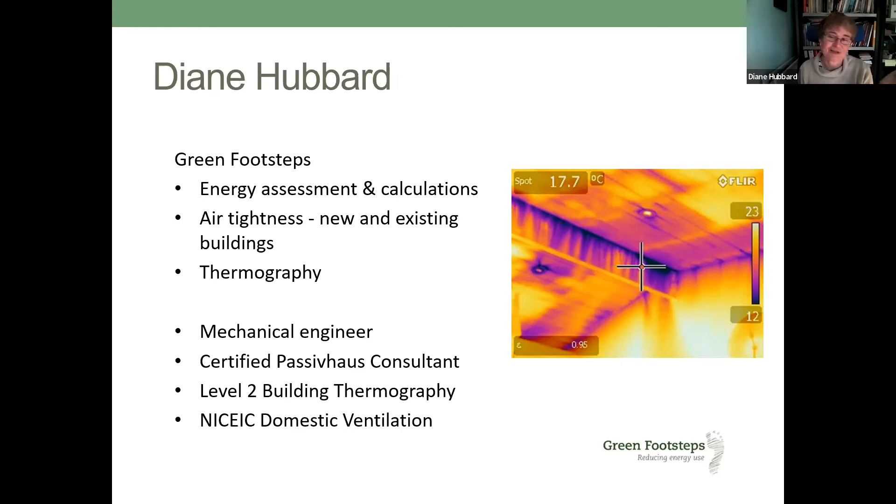So it was really airtightness issues that got me started on looking at windows and doors. I mean, I'm not a windows and doors expert, can I just make that clear? I've basically come to this because of the issues they seem to present people with.

One of the most common things I get is somebody ringing me up saying, I've spent quite a lot of money on, say, a new set of patio doors, and they are a problem. It's quite cool where I'm sitting in my kitchen, what can I do about it? And really, I got a little bit sick of doing these sort of investigations, to be honest.

It struck me that it would be a lot better to address and better inform people who are purchasing their windows and doors so that they make better decisions. It's better from the planet's point of view, it's better from their point of view, and it's putting in best practice. So that's the reason I'm really talking about these.

As I say, I'm not a windows and doors expert. The problems that come up, the most common one I find is over sliding patio doors. But so much relates to the initial specification by the householder. So really, that's the crux of what I'm going to be talking about.

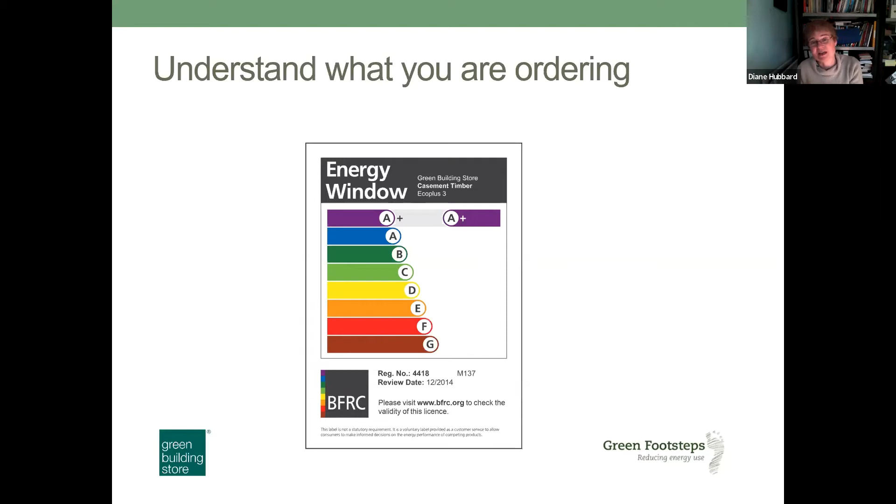Well, it lets light in. We get solar gain through it, but we also have to think of the window as a negative thing, because windows, compared to say wall fabric, perform very poorly because of their nature, because of what they do, because of the fact that they are glass and need to let light through. So we need to think about how the performance of the window compares to the fabric around the window itself.

So what I want to do is talk a bit more about key aspects of the performance. U values is something that's important. I'd just like to explain what a U value is, because it's a technical term and people may not be used to it.

Basically, the U value, the thermal transmittance, is a way of describing how energy efficient a particular thing is - in this instance, the window. If you've got a bigger number, it's letting more heat through, it's more conductive. A small number means less conductive.

To put some specific figures on that, a single glazed window has a U value of about 6. A high spec triple glazed window has a U value of around 1 or a bit less. So you'd lose a sixth of the energy through that window under the same conditions and area. The U value is really important, but we have to break it down more into the glazing performance and the frame performance.

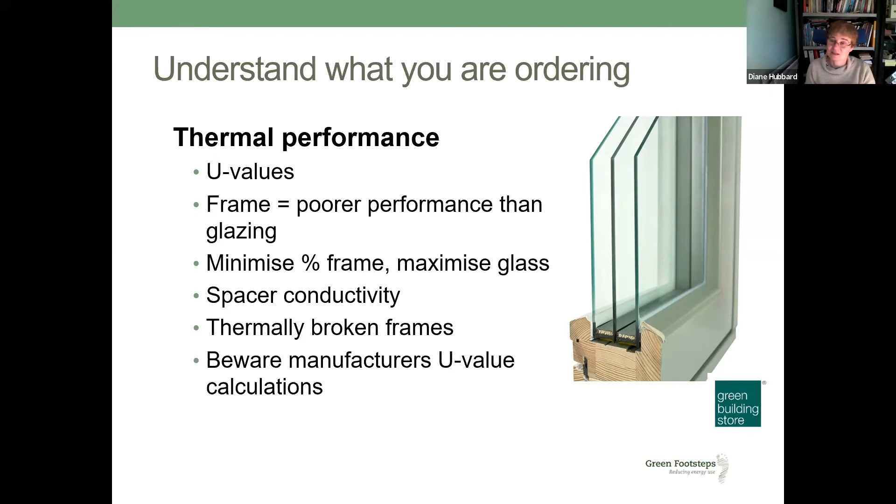Okay, so what do we need to consider when we're ordering? Now, my speciality is airtightness particularly. So the things that govern the airtightness they're actually going to get - because airtightness of windows does vary.

It's going to be determined by things like the style of the window itself or the door, and I'm going to come back to that with a couple of slides later on. But we've also got things like the door furniture and the type of lock - is it a multi-point lock? What are the seals on the window actually like?

I've had instances recently with very high spec roof lights, for example, not Green Building Store ones, another manufacturer, but roof lights that are quadruple glazed, but there is an issue with the seals with them. And on buildings that are passive house standard, small leaks on seals can be a concern. So think about what's your objective, what standard are you looking at, and then you need to be specifying things to fulfill those standards.

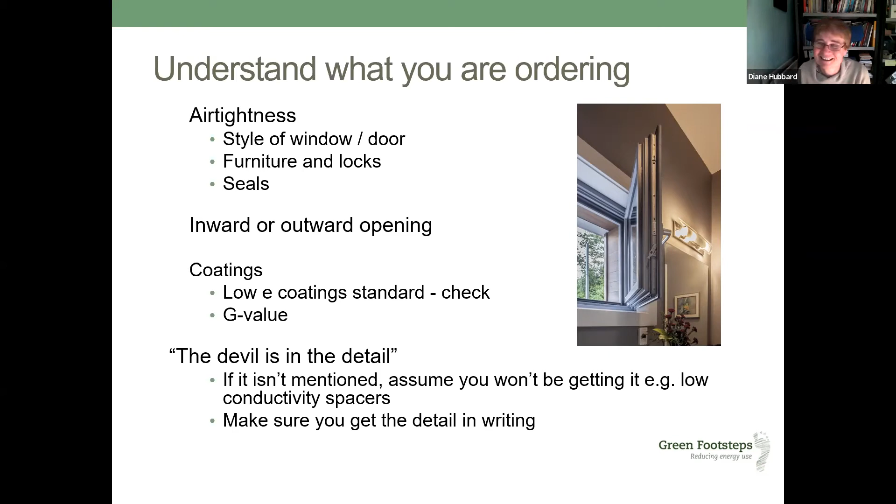Let's step back and think about higher level decisions. If you're remodeling your home, which a lot of people are doing—it's a great thing to do—and you're looking at upgrading the thermal performance, it's an ideal opportunity to remodel several aspects of the building.

Be careful about seriously increasing the amount of glazing that you have, and that's for a few reasons. At the end of the day it's your choice, but there are a few things to think about.

I mentioned at the outset the poor performance of glass compared to, say, a wall, particularly if you're insulating that wall. In terms of U values, if we're thinking about high spec glazing, let's use a U value of 1, for example. A high spec wall would be maybe 0.1 or 0.2, and normal building regs at the moment are about 0.3. So even with very high spec glazing, you're looking at ten times the energy loss through the glazing, or maybe three times if you're looking at normal building regs standard. So you're talking about a big increase in energy loss.

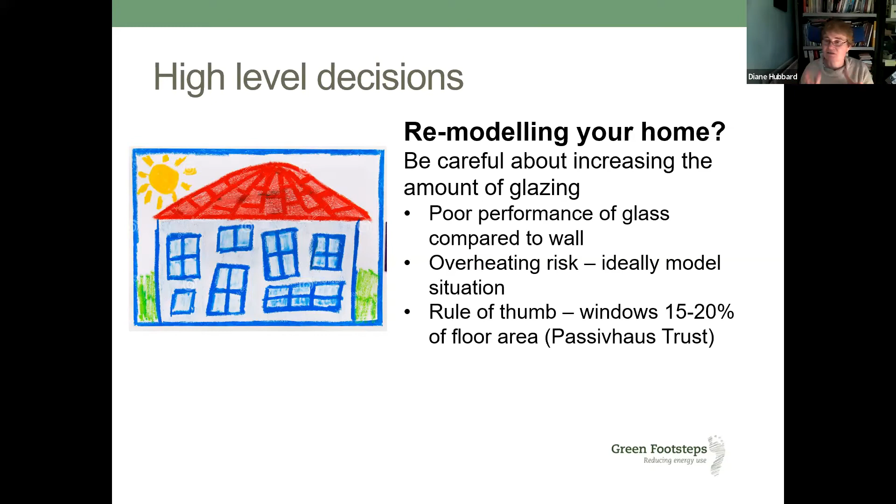Model it if possible, but if you're working off rules of thumb, bear in mind the figures from the Passivhaus Trust: 15–20% of floor area should be your windows. In a lot of cases it can be substantially more than that. At the end of the day it's your decision, but really think carefully about the issue of overglazing and what the consequences are.

So window style is another factor. I've touched before on the frame percentage, but the window style also governs the performance of what we've got, and also the cost. Let's explore that in a little bit more detail.

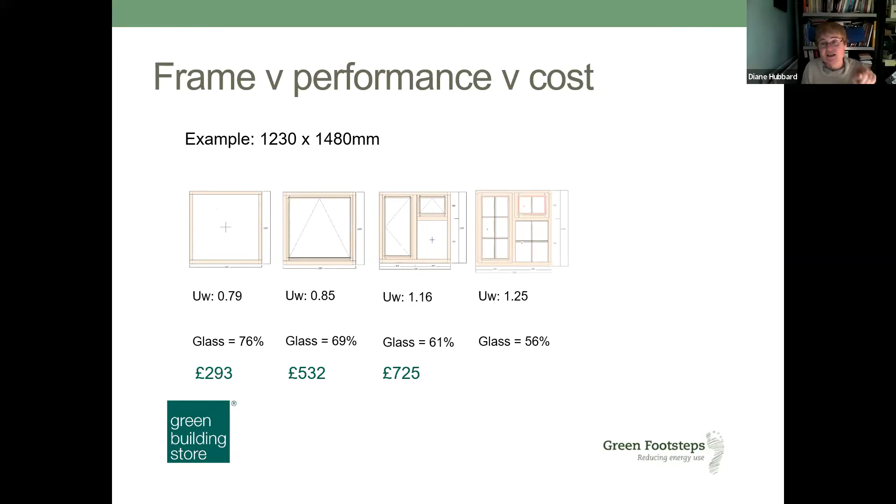So we've got an example here of a window, and we're going to look at various different scenarios. On the left-hand side we've got a basic fixed window, non-opening, and you can see the U value of the window. When it says UW, that means U value for the window as a whole. If it was for the glazing only, it would be called UG, and if it was the frame, it would be called UF.

So on the left-hand side we've got a fixed window with a U value of 0.79, and as we move through the different styles, the U value increases as the amount of frame increases. You can see the percentage of glass goes from three-quarters down to barely over half the window being actual glazing. So that's the issue of the frame.

You could use false glazing bars, so not actually breaking into the glazing, but the simplicity of the window is important. And then you start to look at costs. These are only indicative costs, prices are changing at the moment, but you can see how much the cost increases aside from the U value, the reduction, the poorer performing U value. So style is really important for what we need to consider.

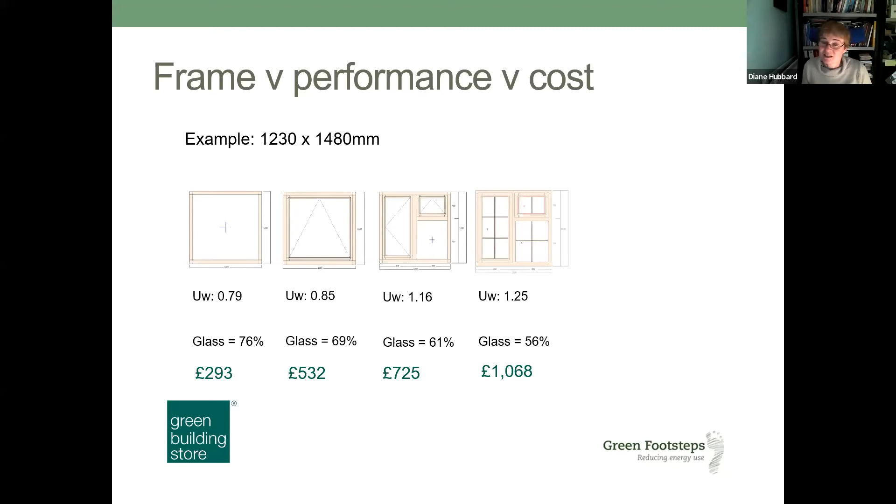So when we're looking at glazed doors, aesthetics can be really important. Depending on what you've got, you might have a beautiful view out of the door, and you want to minimize how much that is broken by the frame. Budget and performance are also important.

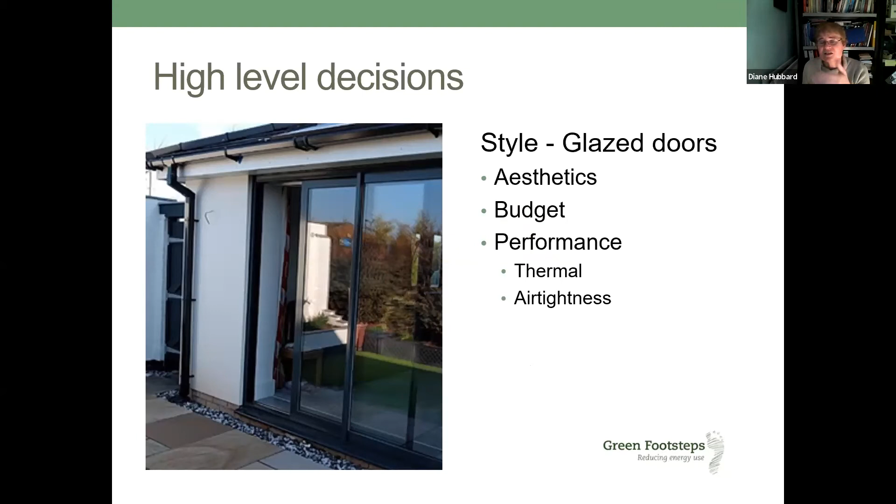In terms of what I see routinely, people really like bifold doors because of the fact that they fold out of the way. The other styles that I see quite a lot of are conventional sliding doors, sliding patio doors, and what's called lift and slide - so where it would be a slider, but there is a lifting mechanism on it to start off with before the door is able to slide.

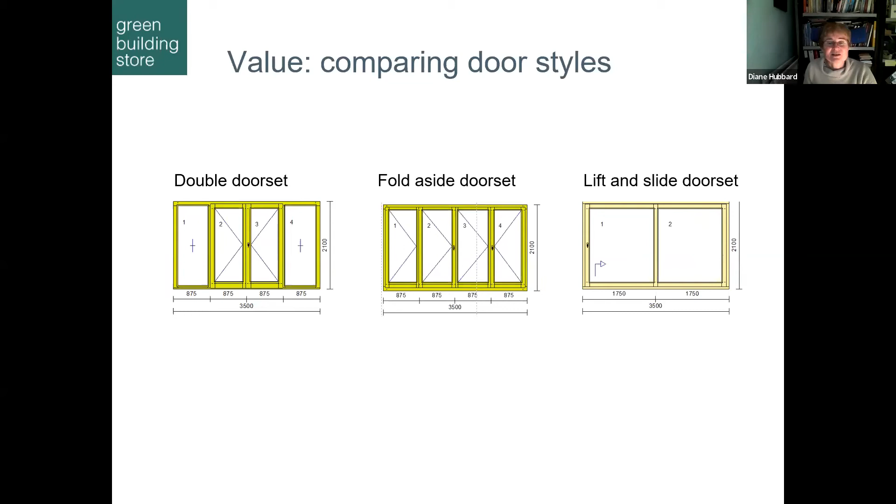Let's look at a bit more on the doors. What we've got here is a comparison for the same area. We've got a double door set - French windows in the middle that fold back and out of the way onto the glazed areas at the side, so you get quite a large open area in the middle but there are still glazed portions. We've got a fold aside door set, so that's the bifold doors, where the whole area folds aside. And then we've got a lift and slide door set, where one panel lifts and then slides over the other panel.

So again, we've got quite a difference in cost between those particular types of door, and some variation in the U value. But in terms of airtightness testing, I see lots and lots of problems with bifold doors, the fold aside door sets. I'm not talking about specific manufacturers, but in terms of what you're actually asking the doors to do, there's lots of fixing points, there's lots of hinges. They're really quite complicated compared to, say, a set of conventional French windows.

So from an airtightness point of view, standard French windows are the easiest thing to get airtight, generally speaking, when you're looking at comparable specs, because they're straightforward - you've got 2 doors that in effect lock into place. The next, well, the worst I tend to see is bifolds, the fold aside door sets. The lift and slides are really usually pretty good. But just standard sliders tend to be quite leaky, though not as leaky as bifolds, generally speaking.

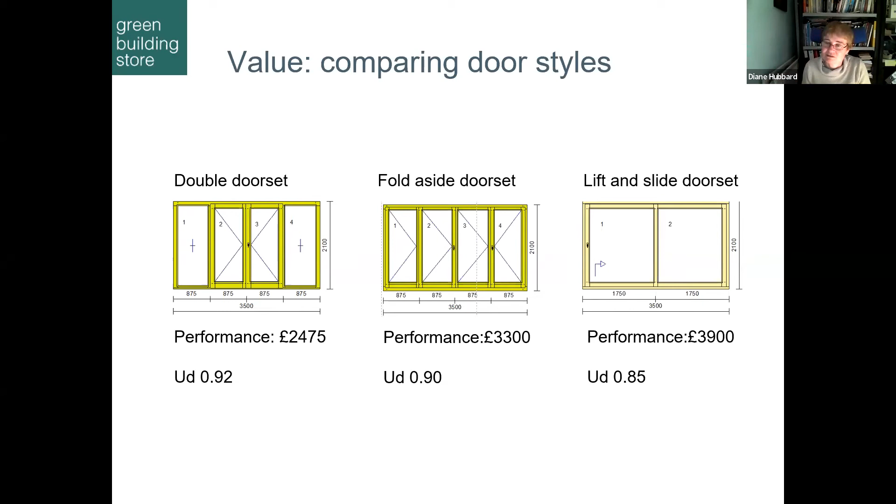And I'm just talking in generalizations here, because it does depend on the spec of the window. We'll come on to a little bit more about technical specs on that and what you should be looking for, but that's broadly what I see when I'm testing buildings.

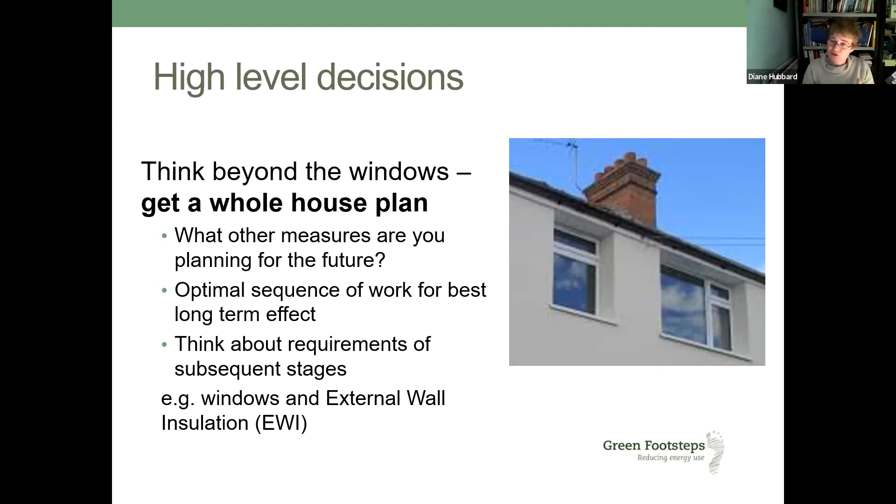In terms of performance criteria, the most common question I get asked is, is my double glazing performing okay when I'm testing buildings? My answer is that's really difficult to answer. When I'm using thermography on a building and I look at windows, I see reflections of what's around, whether that's inside or outside, so it's very difficult to actually answer that question. I can tell you whether they're airtight, that's not a problem, but it's really quite difficult to check what you've got.

So the key is to buy from somebody you trust, somebody who is reliable, somebody who is reputable. That's absolutely key, because you're going to have to take quite a lot in terms of accepting what they say. So again, it's back to specification.

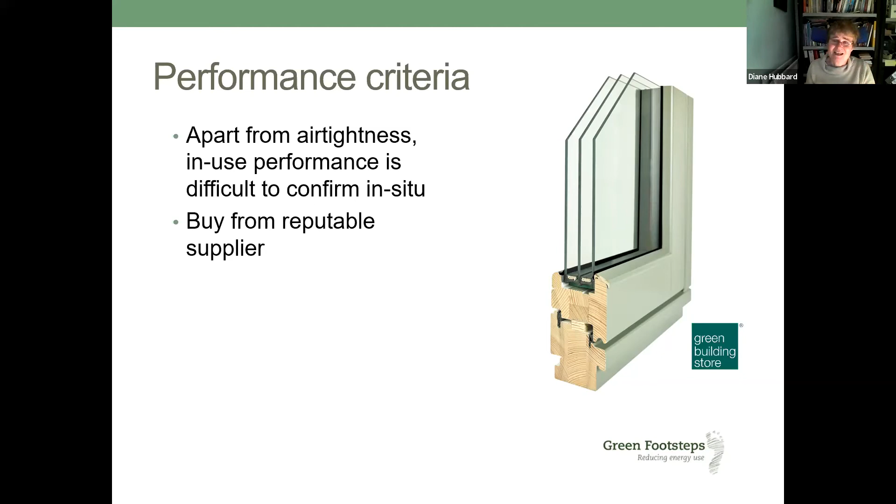Part of this is also a weather tightness standard, so does it actually leak? It's worth checking through the documentation to see if this is referred to, and again, make sure you've got documentary evidence of compliance to the standard. It's heartbreaking when people ring me and say they've spent £10,000 to £15,000 on glazing, and when I look into it, there is nothing behind that. They've ordered on the basis of just an outline quote from a window supplier. So detail is important.

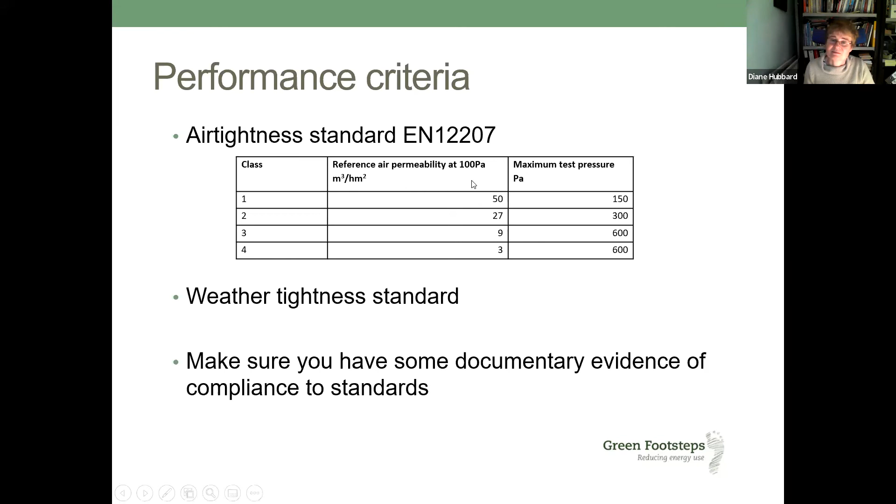Just briefly touching on installation, but simply in terms of relevance to specification, there is a benefit in the window supplier installing the windows. There's a real benefit in it being all in one place. If there's a problem and you've bought it from somebody and somebody else has installed it, then they can blame each other. Particularly with large areas of glazing, the tolerances on installation are really quite tight in terms of windows performing, so that really is the best route to go down.

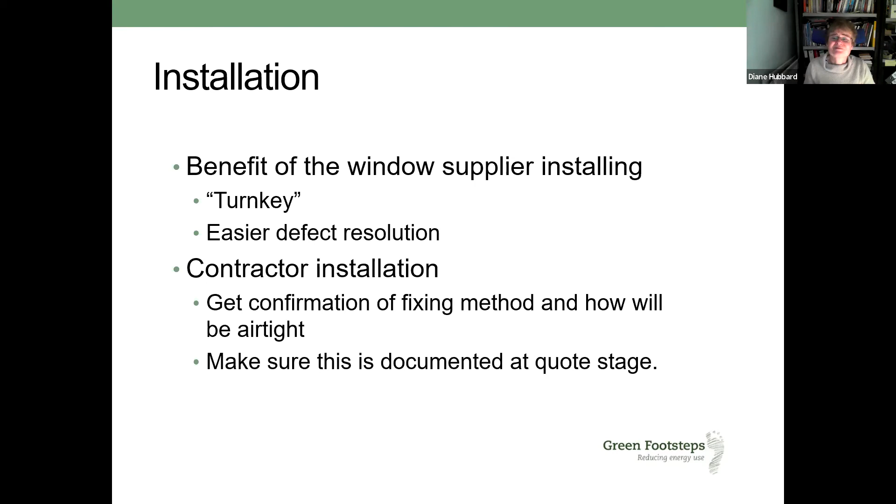The next presentation will go into lots more detail, but make sure when you're ordering windows you get confirmation of how they're actually being fixed, how they will be made airtight, and make sure it's documented at the quotation stage. I'll touch on that again when I cover one of the case studies.

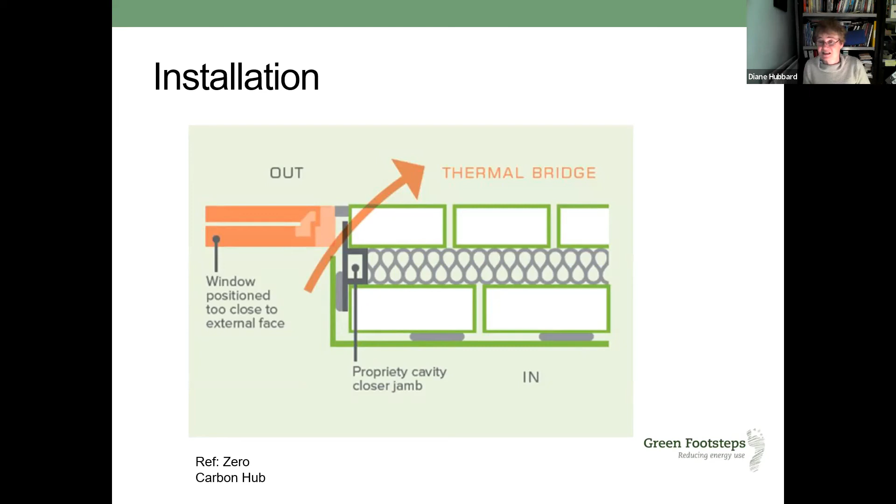When we're talking about installation, make sure it's specified that windows go in the right place in the wall. In this drawing, ideally the window should be fitted in line with the insulation, wherever that is. Thinking about your whole house plan again, what you might be doing in the near future could govern where the window sits. In this instance, the window is in effect too far out, so there's actually a thermal bridge there, and you'll have a cold spot on the inside of the wall. So making sure the window is physically installed in the right place is key - that's window position.

We also need to make sure internal and external reveals are insulated or have the capability to be insulated. We need to think about the fixing method, the airtightness, and the use of appropriate airtightness materials. And what are you going to be doing in the future - does it all fit in with that? These are all important things you need to think about before you place the order.

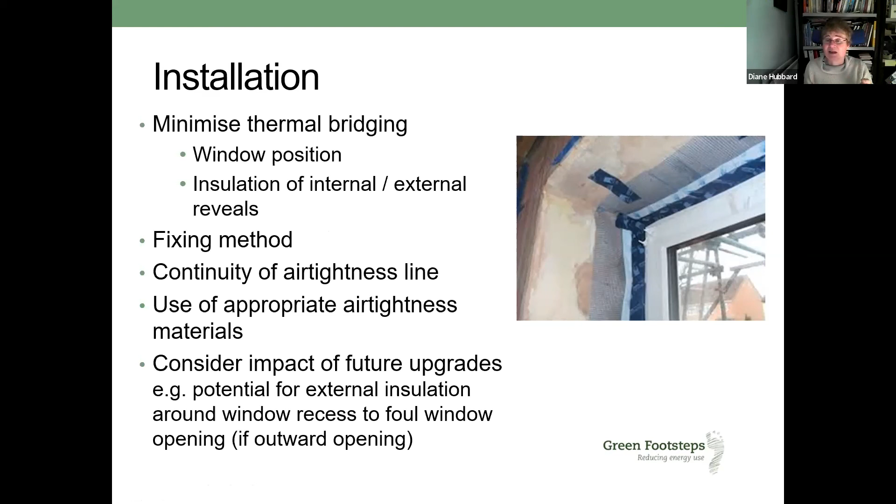So a couple of case studies, just a few minutes on this. What I've got here is a new build property, not a retrofit. This is a large area of glazing, about 7 or 8 meters wide, very high spec - class 4, the highest spec of air tightness.

Now this is a test - the building was being air tightness tested at the time of the thermography, so the pressure is lower inside the building compared to outside, and air is being drawn in. Under normal circumstances, you wouldn't necessarily see these leaks unless the wind was blowing onto that particular window. This is one advantage of doing an air tightness test - we can actually see the air coming through around that glazing, and this enabled the builder to raise a complaint.

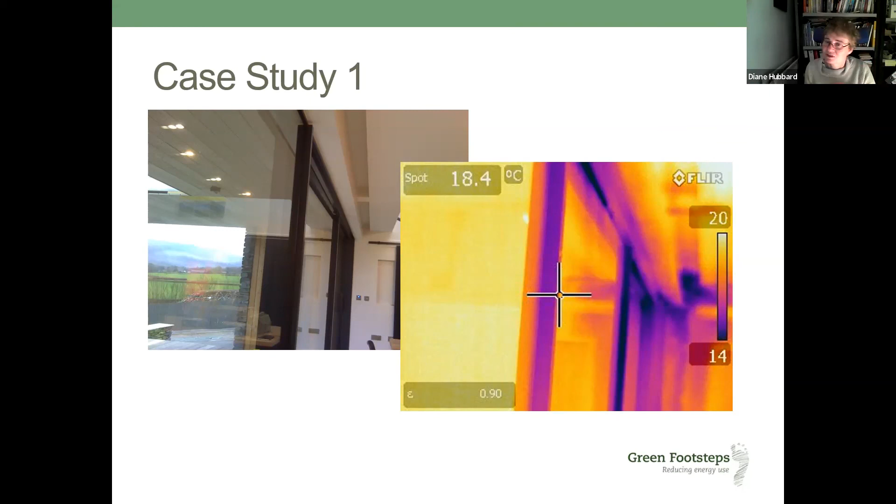These particular windows were made in Austria but installed by a UK installer. At first it was, well, we never had a problem with our glazing, but the thermal images enabled the builder to raise the issues. So having evidence is quite important. Buried in their documentation, they did comply to this EN standard, and that enabled the builder to make sure that things were rectified. It took quite a lot of work to get over the problems in this particular instance.

The second case study is a retrofit, and it's, yes.

Can I just raise one really important question as we go along? Hilary asks, what are the reveals? The reveals are - if you think about the window, the bits of wall that are around the window, that is the window reveal. So it's the lead in to the window. Is that all right? Thank you.

So this second case study I've got here is a single patio door. This is a retrofit where the client put an extension onto the building as well. This is an investigation, a retrospective investigation from my point of view. The client had basically said to the installer, the windows are leaking, his seating area is adjacent to the window. He said, I've spent sort of £5,000 on this window, or sliding door rather, and it's not what I was expecting.

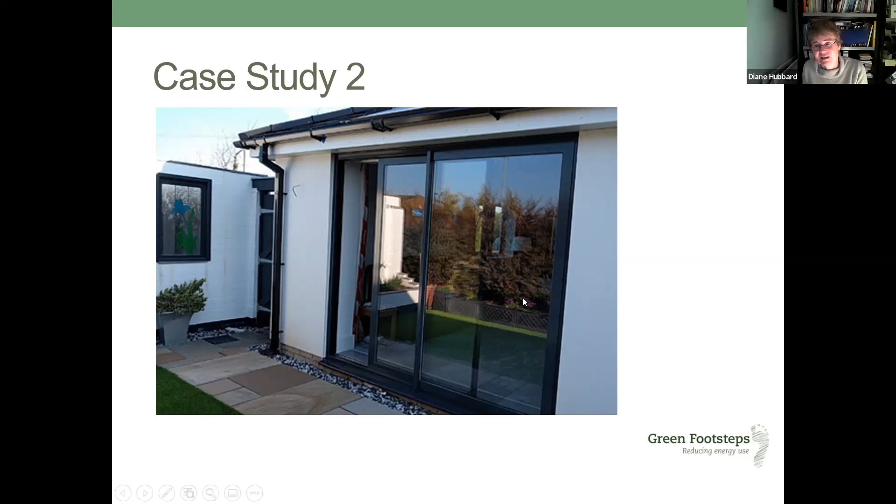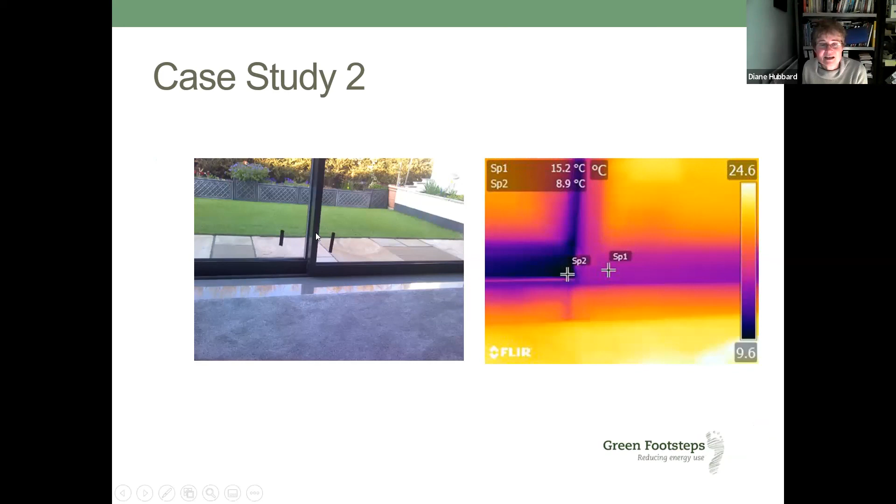In effect, what I did was I tested the building, and then I covered over the whole area of glazing to see the difference in the result between the building before and afterwards, to put a figure on whether the building was compliant in terms of the class of glazing that it was. This was class 4 glazing as well, so the highest spec, and it clearly fell outside - it barely complied to class 1 glazing. So it confirmed that there was an issue present for the client. Unfortunately, it still proved difficult to resolve.

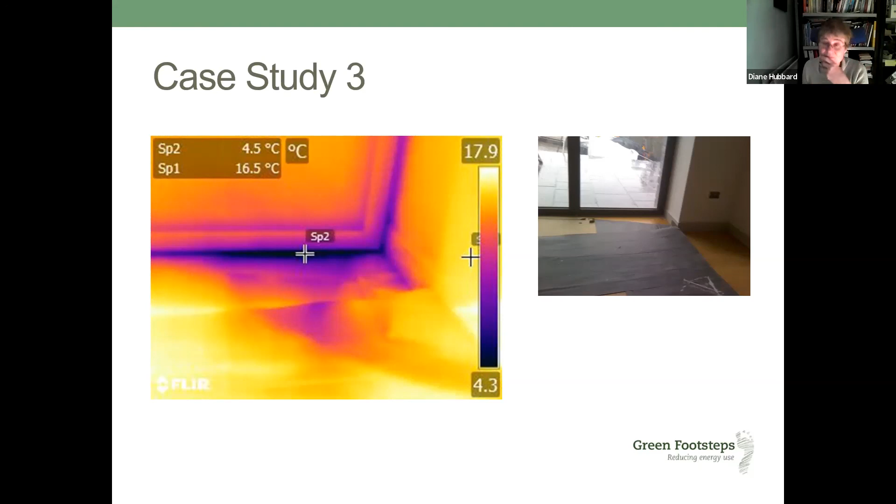And in the same building, this was a large area of glazing. Because of the nature of the glazing, it was a corner of glazing, big area of glazing meeting, basically to take advantage of the wonderful view from the property. Class 3 glazing, so not such a high spec.

What had happened was that a corner of the glazing had dropped after installation, and as a result, air was streaming through this section. The section to the left-hand side was movable, and the section to the right was fixed. Air was streaming through this area here, which is what the thermal image is showing, how cold air is actually coming in under test conditions. Because of how the glazing had been purchased, the situation was rectified quite swiftly in this particular instance, and it was attributed to that particular problem.

But if it had been a separate installer from the manufacturer of the glazing, it would have been a lot more difficult to get the situation resolved.

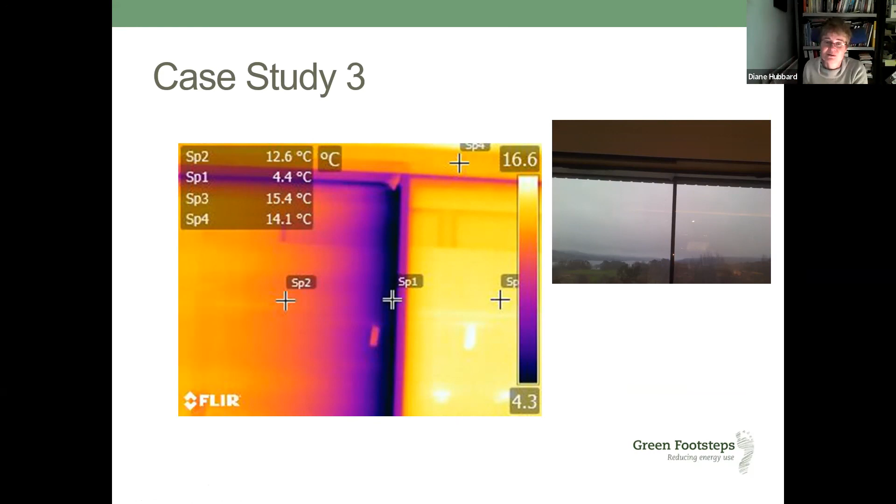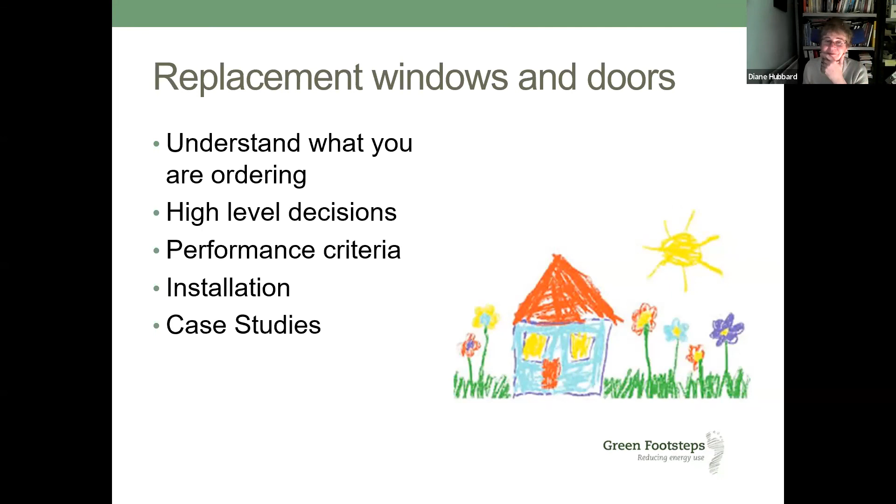So what I've tried to do is help you understand what you might be ordering, really, and the importance of making sure you have clear specs and get everything in writing. But you also need to think about the higher level stuff - are you putting the right amount of glazing in, what style of glazing are you looking at, and thinking about the performance criteria as well. Installation will be covered next time in more detail. So I hope that's been helpful, and I look forward to some questions.